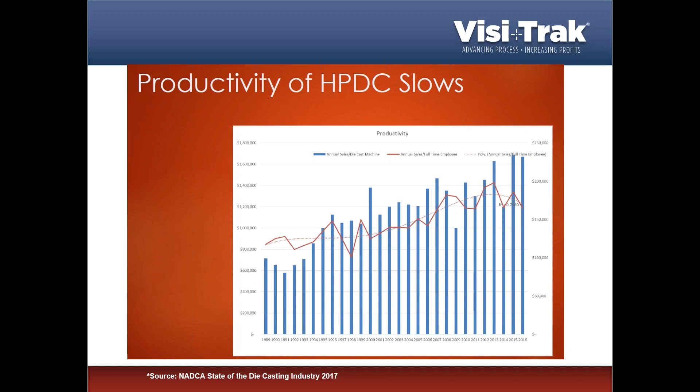But there are alternatives to casting. The steel industry is very strong. Some consider stamping or forging, and in recent years we've seen parts that were made of steel come over to aluminum, which has been great for us. But if productivity is not maintained at a high level, you lose some of those cost advantages. So as an industry, we feel it's very important to look at ways for casters to improve their productivity.

So of course, you look at your machine, you have unscheduled time that doesn't count against you. The machine's not supposed to be running. That's not necessarily a bad thing. But if you are supposed to be running, the first metric we look at is availability. So that's your A.

Anytime anything knocks your machine out of production, that's going to affect your OEE score and drag it down. The second metric that is included in OEE is your P, which is your performance, which is your cycle time, and that just relates how long it takes you to make a part for each cycle of the machine. Final metric is quality. Anything that counts against that is parts that are scrapped, that are not made within specification and

need to be scrapped. So I thought it was really interesting at the recent plant management conference. The top topic that people wanted to cover was improving productivity, and we do kind of a roundtable discussion, and people throw out ideas about what we can do to improve productivity. And I was in the audience listening to all of the suggestions that were being mentioned, but they all related to decreasing your cycle time.

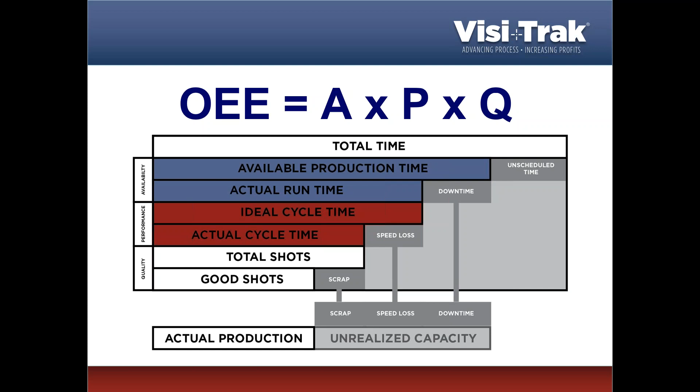When we talk about casting, we think about it as a holistic process. It starts with simulation, then goes to die concept and continues on through processing and process monitoring. You look at this and say, we need all this in the die casting process, and if you take anything away, it's going to adversely affect it. But then you also want to prioritize within this process. What are the most important things, where can I get the most bang for the buck, and what do we want to prioritize on?

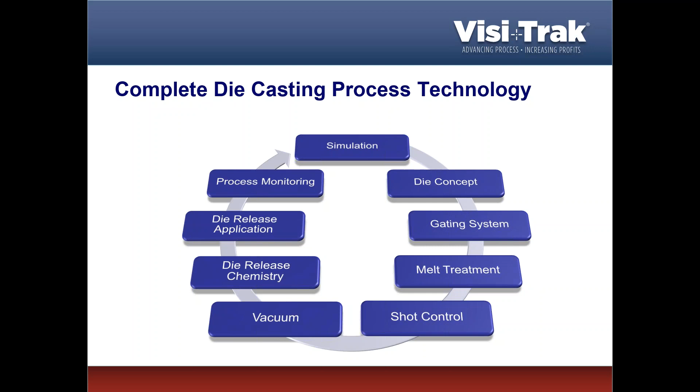I think if you ask most experienced casters, they would pick out two priorities in this process, and first and foremost is die concept. You can't have a good process, and you can't make a good part without a good die concept. So that's really important. But of equal importance is shot control, making sure you have a machine that is capable of optimal shot control. So in the presentation today, we're going to focus specifically on shot control.

At the plant management conference, another presenter was Hal Gerber of Shiloh Industries, and he had a good tangent in his discussion about the method of casters. We have simulation, we have die concepts, we have experience. Those are all ingredients that make up our process. Once you have that process defined, you want to be able to make it repeatable, and make sure your machine is capable of accomplishing what your method is telling you to do. So a shot control upgrade will give you this ability to be accurate and precise.

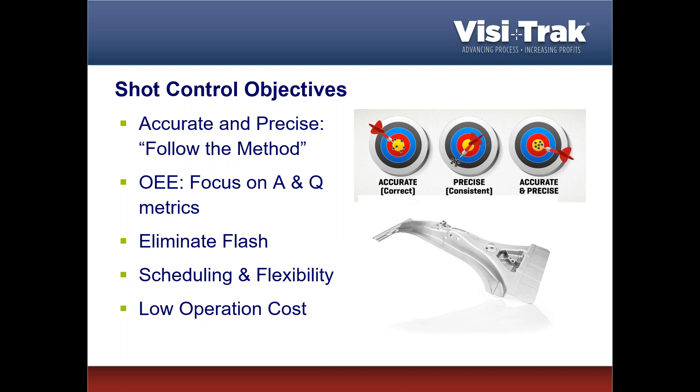Are your maintenance personnel spending a lot of time on the machine? You have a lot of downtime on the machine. These are all costs that affect your operating costs. We want to make sure that as a caster, you're really looking at all those costs and looking at ways to eliminate unnecessary costs. So really, really important, because shot control can help you out on those aspects.

And then after looking at objectives, we look at considerations. So you've got a die casting machine. What do I want to consider in terms of could it be upgraded and should it be upgraded? And sometimes we come into machines and we look at them and say, the machine is in such poor condition that it's not even worth investing more money to get this machine improved. And then we talk about machines, like snapping tie bars, that won't stay square. So machines like that, you're probably better off just scrapping the machine and getting another one to replace it.

But let's say the machine is in good enough condition, it has been maintained, there's just certain things that are lacking. In those instances, you want to evaluate the machine and consider which one of the upgrade paths would make sense and would be best for your machine. One of the big determiners that's going to do that is to look at the hydraulic layout. You've got your hydraulic schematic and everything's piped together on your machine. So you want to look at that.

And some of the things we look for is, does the machine have a close coupled accumulator? Is the hydraulic circuit neat? Is it efficient? And is it too complex, or is it simple? And I kind of illustrate this point by pointing out my experience in the die casting industry is 4 years. So I started with Visi-Trak in 2013, and before that I worked for Parker Hannifin distributor, and we sold hydraulic technology, but to general industrial applications. So we could have been on a steel mill, we could have been in a food processing plant, we could have been on transfer equipment.

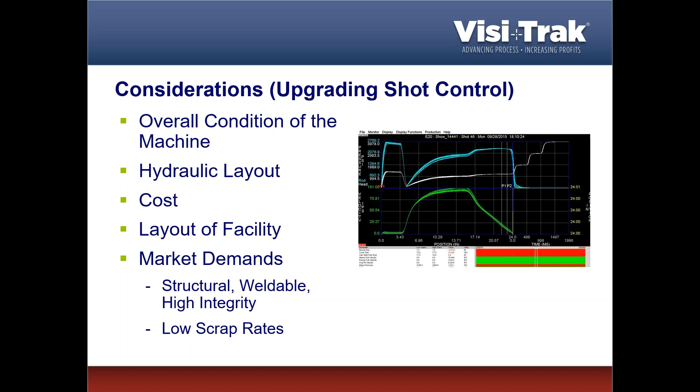This is a quick little slide just to illustrate a point, and I'll admit it's a little bit hokey, but let's just go with it. Let's say you were considering a Corvette, and two of your big considerations are going to be cost and performance. If you went with a brand new Corvette, there's a cost somewhere in the $79,000 range. But you could also consider a pre-owned Corvette, maybe 20 to 25 years old, and get that for a much lower cost. Cost difference in this is $60,000, $65,000, $68,000, something like that.

But you're going to get the better performance with the newer vehicle. You get the larger engine, more horsepower, your 0 to 60 is a lot faster. So how does that balance out? Well, what if there was a box of parts you could implement into the older Corvette, and get performance that either approaches or matches the brand new vehicle? Is this realistic on a Corvette? Well, probably not. But in a die casting machine, we have taken machines that were 20, 25 years old and had them perform just as good as a brand new machine.

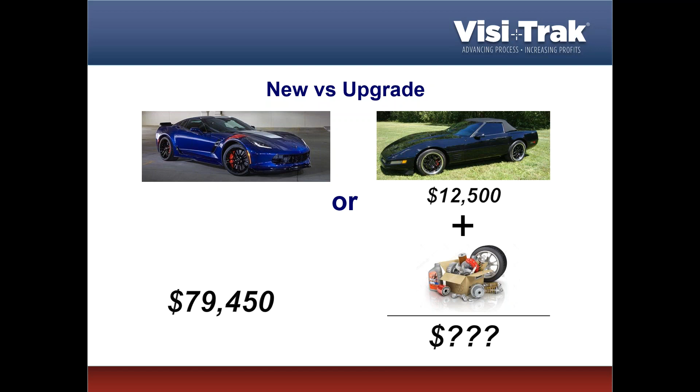How much is that box of parts going to cost? That goes back to our slide about considerations, but the other side of it is the performance side. When we're talking about your machine and your performance, you want to have a very responsive system. A lot of casters are taking an approach called MFT, minimum fill time. So you have a very slow, drawn out advance of the metal to the gate, and then once you get metal at the gate, you want to ramp up to a very high speed and a very rapid acceleration.

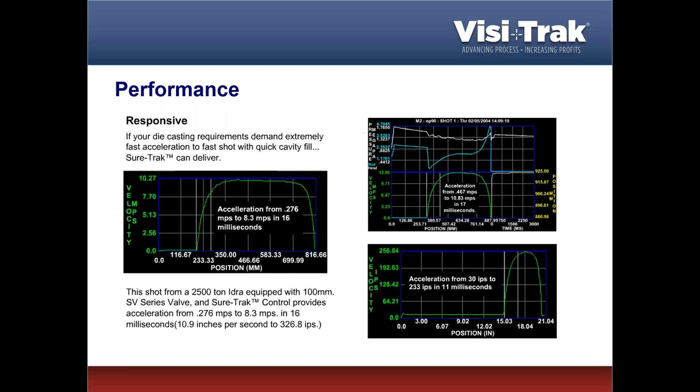The other two examples here are just some other machines, but if you're into the metric system, we've got in the top on the right, they're going from 0.467 meters per second all the way up to 10.8 meters per second. That's only taking 17 milliseconds. And then to get back to the English units, in this bottom right, we're going from 30 inches per second to 233 inches per second in only 11 milliseconds.

So now I'm going to focus on some different hydraulic circuits that we encounter on die cast machines. The first I'm going to look at is meter in with brake, and in total we'll look at three different configurations, and each one could be identified with being made in a certain geography and of a certain vintage. This one is typically seen in the Chinese market, where it's a meter in and a brake valve. The basic principle here is you've got your injection cylinder, and when you're injecting metal, your cylinder is extending basically over to the right here. And we've got an accumulator that's fully charged up.

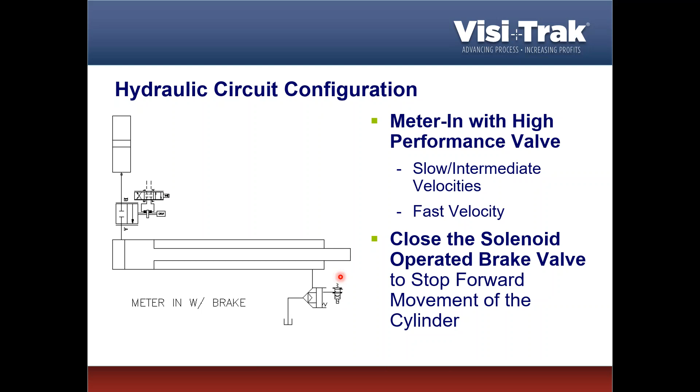We will have a high-performance proportional or servo-operated cartridge valve, which is in charge of modulating the flow from the accumulator into the head end of the injection cylinder. We'll open this valve a little bit to get a slower speed, and open it a lot to get a faster speed, and we'll use this high-performance valve for both the slow phase and the fast phase of injection. When we need to stop the forward movement of the cylinder, you can't stop it completely by closing this valve. You've still got the forward momentum and all this fluid on the rod side. So what we'll do is close this valve off on the rod side, and that'll basically stop fluid from moving out, and that will stop the forward movement of the cylinder. So that's a meter in with brake hydraulic configuration.

The second configuration we'll look at is what we call a meter out circuit, and the meter out circuit is pretty typical of a machine built in North America. Prince and HPM basically manufactured to this concept. Same thing, we've got an injection cylinder being fed by an accumulator. In this instance, in order to start movement, we will open up this blocking valve, and that gives full pressure, full flow capability into the head end.

In order to control speed, we will have a high performance valve on the rod side and modulate this valve. For a slower speed we'll open this a little bit to have a little bit of flow, and for a faster speed we'll open it a lot to get faster flow and faster speed. In this circuit, we're controlling all three phases of the cylinder's forward movement with the high performance valve. So we're doing slow phase, fast phase, and low impact, all with one single high performance valve.

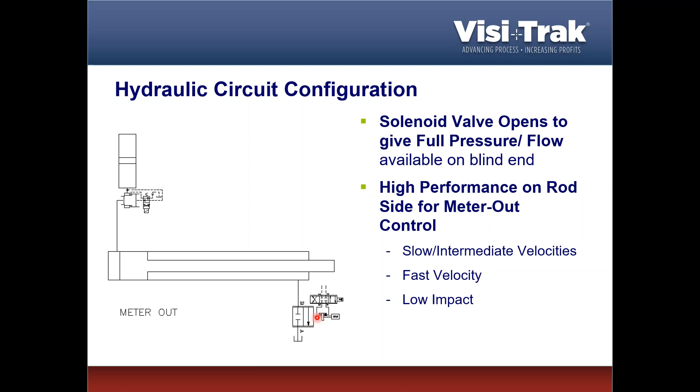The third and final configuration we're going to look at is what we refer to as a double meter in and a meter out. So you've got three different phases of movement, and you've got a separate high performance valve to handle each separate phase. You'll size the valve in accordance with whichever speed you need during that phase. So you'll have a smaller valve to do your slow and intermediate velocities, and then you'll have a larger valve, probably the largest valve in your circuit, which is in charge of modulating flow into the cylinder during your fast velocities.

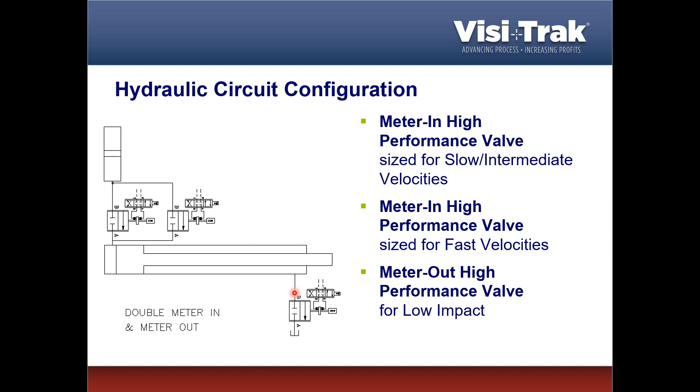When you need to stop after your die cavity is full, and you want to stop forward momentum of the cylinder, you'll be able to ramp it down with what's referred to as a low impact valve. This again will be sized in accordance with the flow rate out of the rod side of the cylinder while ramping down from your fast phase to low impact.

Looking at all three circuits, let's do a little compare and contrast. Again, talk about cost and performance. Out of the three different options, they'll have different costs.

Think about which one would be the most expensive. Well, the double meter in with meter out has three high performance valves, so in terms of upfront cost and spare part cost, this configuration is going to be the most costly, the highest cost associated with it.

And then let's talk about performance. So we say, what's the performance of each different configuration? Well, we do have a high performance valve on the meter in for your slow phase and your fast phase velocities, so you can get good performance out of that.

But when you talk about your end of shot position, in these instances, this brake valve is usually just a solenoid operated valve, which is being commanded by a PLC, which has a scan rate. And the faster you go, that scan rate may not be able to keep up and be consistent. So you also have a response time associated with this solenoid valve. So in other words, we give a signal to say close. It's going to take 30 milliseconds or whatever it takes to fully close.

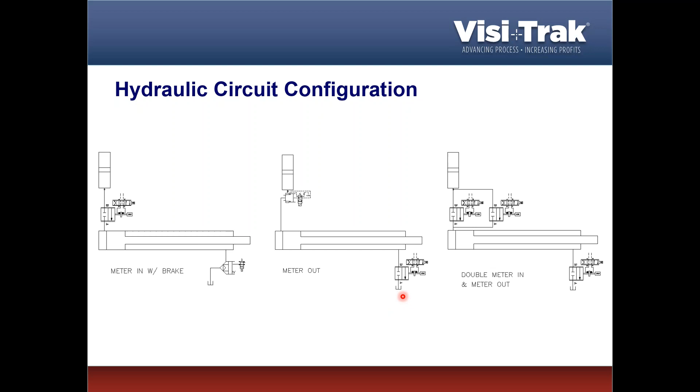Why we see better repeatability in this instance is because we've only got one valve doing it, so we don't have to trade off control. So we tend to see better performance using the meter out circuit. But we see the best performance out of the circuit when we also implement the valve that is designed specifically for the die casting operation, which is the Olmsted SV valve.

So this is a valve that's a result of a joint development between Olmsted Products and Visi-Trak, probably back in the late 90s or early 2000s, and it's a DIN cartridge, meaning wherever you are in the world, people can manufacture to the specs. So your Parker Hannifins, your Vickers, your Bosch Rexroths, everybody makes the valve to the specification, and what that allows you to say is wherever I am in the world, I can have confidence that I'll be able to acquire a valve that'll fit into this hydraulic circuit.

But the real benefit of this valve is that, again, it was designed specifically for the die casting process. So it is designed to handle your slow phase, your fast phase, and your low impact phases. And one of the big reasons that we're able to do that is because of the flow window. And when I say flow window, this is the path that the hydraulic fluid follows to get out of the cylinder and basically back to tank.

We're modulating it in this flow window, and you can't see it great in this picture, so I'll just kind of draw it out. At the factory, they call it the bike seat, just because it's kind of in the shape of a bike seat. And basically the principle here is for slow phases we'll be in this metering notch here, and just allow a little bit of flow. That's when we can do real fine, precise control on the slower speeds.

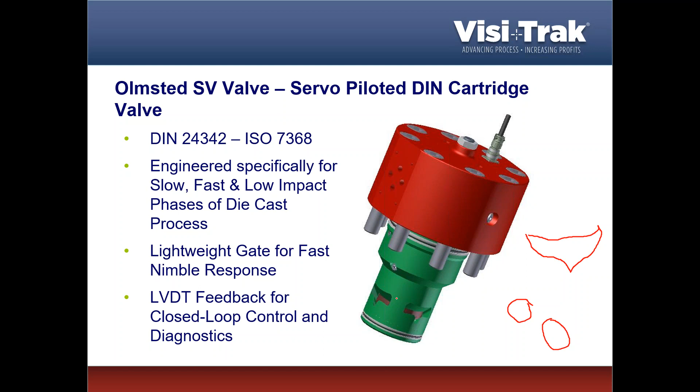If you do closed loop controls, we'll do that specifically on your speed. So it allows us to be a lot more repeatable, no matter what speed you're commanding. Also, the LVDT allows you to do some diagnostics. So when you're setting up, when you're tuning the valve, you can look at the LVDT feedback and know where you're at. And if you're having any troubleshooting, you can command the valve to do different things and make sure that what you're commanding is also what you're actually seeing on the valve.

And there's companies out there that offer brand new shot ends. I would say two of the most prominent in our industry are Diecast Press and ITL, who are regular customers of Visi-Trak, and they're happy to implement Visi-Trak's technology into a new shot end. So that's one upgrade path, is to replace the shot end.

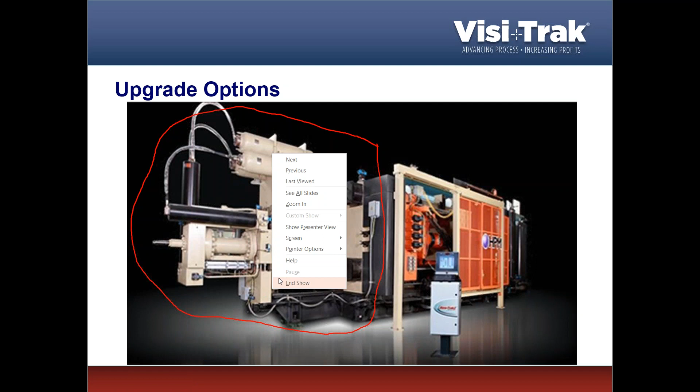Next, a little bit less than a new shot end, would be to consider what we refer to as a modified hydraulic circuit. In this instance, the clamp is still good. Most of the injection cylinder and everything on the shot end is in pretty good condition. So the shot cylinder is good. The accumulator is close coupled, but the hydraulics that control your injection movement are kind of lacking.

So in those instances, we would eliminate the existing hydraulic circuit and implement a new hydraulic circuit using the Olmsted valve. Of less complexity is what we refer to as just implementing our valve. On these machines, they already have a DIN cartridge valve cavity. All we need to do is take out a valve, install a new valve somewhere in this region, and then we can implement the new valve plus the Visi-Trak control system and accomplish a control upgrade.

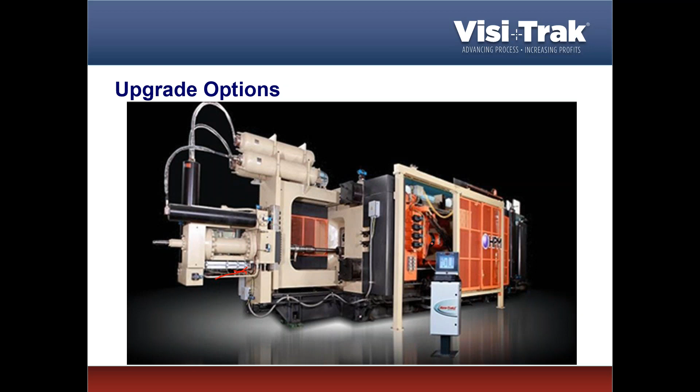And then the final upgrade path is, let's say you just want to keep your hydraulic circuit as is, but then just implement a new hydraulic control system, and we can accomplish that also depending on the configuration of your machine. So again, those are your upgrade options, starting from the most costly and then ranging down in terms of complexity and cost.

Now I'm going to shift into the couple case studies that we have to show, and we're going to go the other way. We're going to start at one of the easier, not very complex control upgrades to implement, and the following two are going to be a little bit more costly and more work to implement. This is a nice case study here. This was the portion that John Cleary of Allcast presented. They had a relatively new LK machine in their facility, and they were doing okay with it, but they had a couple reasons why they wanted to change it out.

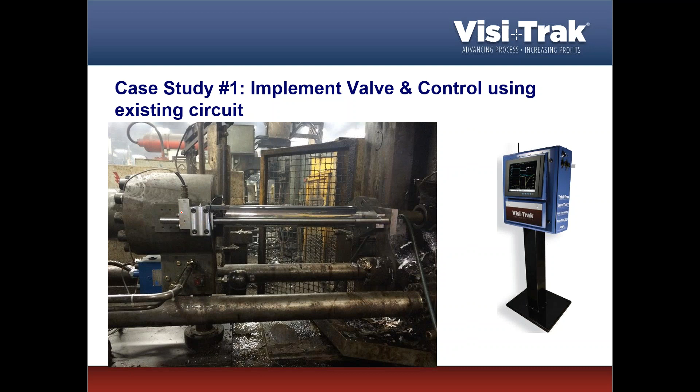So they went ahead and implemented the Visi-Trak control solution, and this was fairly easy to do because all we needed to do was implement our control system. They already had a hydraulic cartridge valve in the circuit, so we simply needed to remove that valve and in its place install the Olmsted valve. We also implemented our sensing technology. This is really one of the best ways to know your position and velocity of your injection cylinder. Visi-Trak was one of the pioneers in this technology, which has since been copied by many die casting applications.

So what I've basically done is taken John's presentation and condensed that. This was a nice quote that he shared, and it speaks to how the casting industry has evolved in the 30-odd years that he's been in it. When he started in 1982, if you controlled 95% of your variables within the casting process, you had a good chance of making an acceptable casting and having a good process. But with advances in what casting customers are asking for these days, you now pretty much have to get 100% of your variables in control to make sure you have a quality casting and a good process.

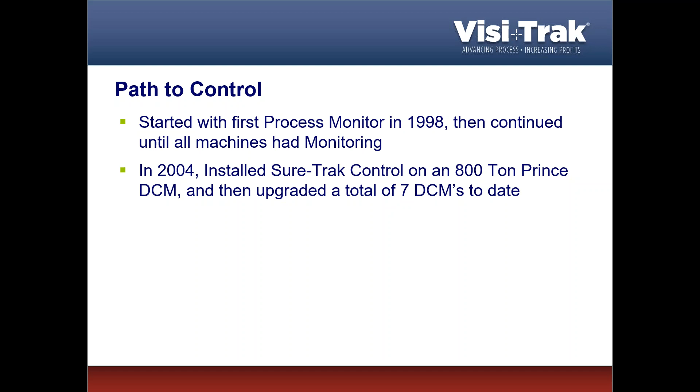So he shared a little bit about their path to control, and it was actually pretty similar across much of our customer base. They started with process monitoring on a single machine, and once they had our monitoring system implemented on one machine, they quickly followed suit installing monitoring on all of their machines because of the benefits it brings. Then in 2004, they got started with their first control upgrade, an 800-ton Prince die-cast machine, and since then, they've got a total of 7 die-cast machines which have implemented the Visi-Trak Sure-Trak control system.

And why upgrade? They already had the monitoring on all of their machines, and they were seeing the variance in performance on their machines controlled by the Sure-Trak control system versus the machines controlled with PLC machine control. What I'll show in the next couple slides is they were able to get consistent performance out of their Sure-Trak controller, but not so much off of their PLC machine control.

And why is that? Because with a lot of PLC machine control, you're dealing with a scan rate which may not be optimized to the casting process. And you're also dealing with solenoid operated pilot valves, which have a response time associated with them. So the repeatability when you're going high speeds is not that great. Here's what they found. This is a comparison.

On the left would be their machine, which is controlled with just a PLC controller, and on the right is the Visi-Trak controller. And calculated startup fast shot, very important process parameter to casting. You want to be accelerating metal into the die cavity. But if you start your fast shot early, you're going to get caught at that gate, and you won't get good performance. And same thing, if you start late, that's problematic as well.

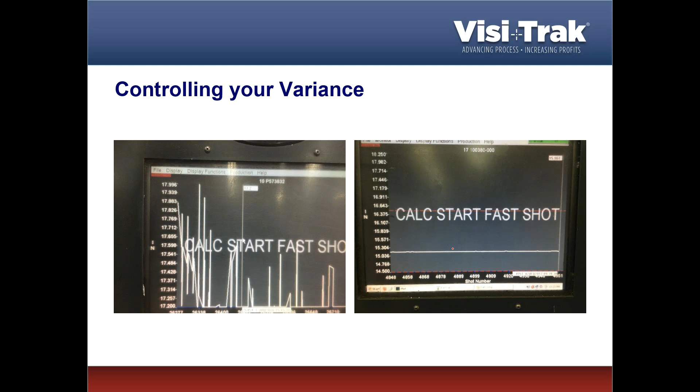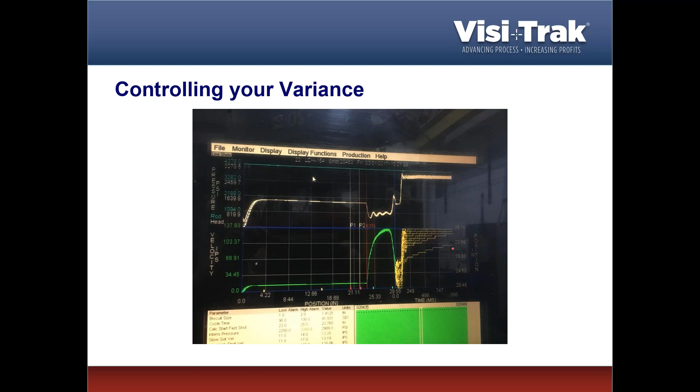But as you can see, with the PLC control they were not getting consistent performance. But with the Sure-Trak controller, very, very good consistency across their process. For those that are really familiar with Visi-Trak, we have a feature where we can overlay. So from cycle to cycle, we'll put shots on top of another, and it's just a good way to check repeatability. And this is a picture from one of their processes, and you can see with the Sure-Trak controller, they're calling for it, they're hitting it, and they're just repeatable again and again.

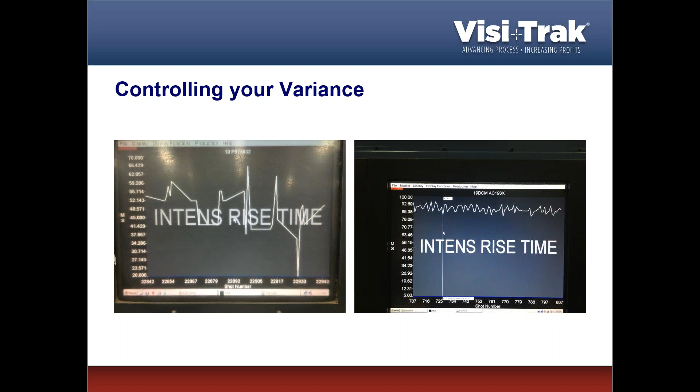We also did intensification control through our control system, so not only the injection, we can also control from an electrically driven proportional or servo valve. We can control their intensification process. And again, you can see that in the process parameter, it went from a very unstable, not repeatable process to much better consistency in the Sure-Trak controller.

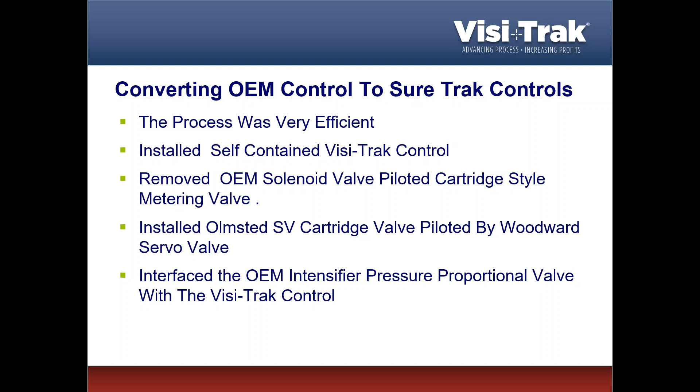What was the process like for them? John shared that it was very efficient, and this is the process that they followed. They installed the Visi-Trak control system, removed the existing OEM supplied cartridge valve, installed the Olmsted SV valve, and interfaced the intensifier control valve to our control system. So they did the first one, and it only took about 2 days. And then after that, they did 2 more machines on site, and it was down to like a 4-hour upgrade. So they were taking these machines out but getting them right back into production, which is very, very good performance.

And what were the benefits? This is direct from John Clary, and we love to see this feedback. They were basically uniform throughout their process. All their process control technicians only needed to learn one system. Their maintenance personnel only needed to learn one system, and all the spare parts were good across their entire floor. And again, this was written by John Clary, so excellent customer support. Thank you. It was very, very nice to hear, and also very important for us at Visi-Trak.

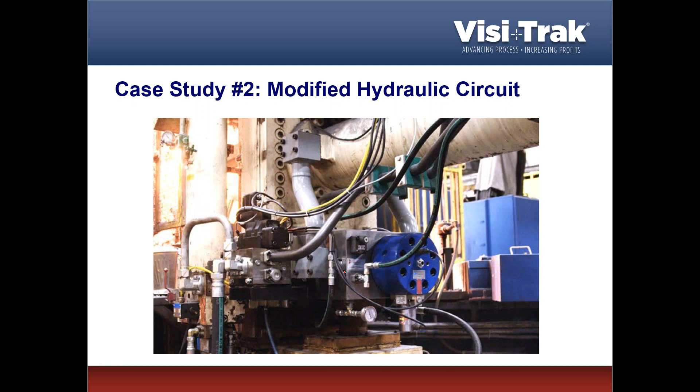So the next case study, number 2, is the control upgrade that we implemented at Metaldyne in Twinsburg, and this is where we're going to do a modified hydraulic circuit. In this instance, the clamp, everything was good on that side. Most of the shot end hydraulics were in good shape. It was just the hydraulic circuit was not optimized, and we didn't have a path where we could simply insert the Olmsted valve. We needed to make some changes to the way the hydraulic circuit was piped, and this is a picture of what that looks like.

Near the end of 2013, we started talking to Metaldyne, and they had a project. These were some of the objectives they were looking at. They had one machine in particular where they wanted to improve part quality, and they felt they could do so by improving the accuracy and consistency of these 4 process parameters. And I think any caster will agree that those are critical process parameters. So they wanted to look at ways they could get better performance there. They also had a high incidence of flashing on this machine.

And they also had a lot of work scheduled on this machine, so anything that they were going to implement, they needed to do so in a way where it would get the machine back into service ASAP. They had a lot of downtime on this machine, so the maintenance technicians were spending a lot of time. They had to purchase a lot of spare parts to keep the machine running, so ways they could eliminate those hassles. And also looking ahead to what their customers were demanding, being able to improve the capability of the machine was going to be really important to them. And they considered a number of different paths: new machine, new shot end.

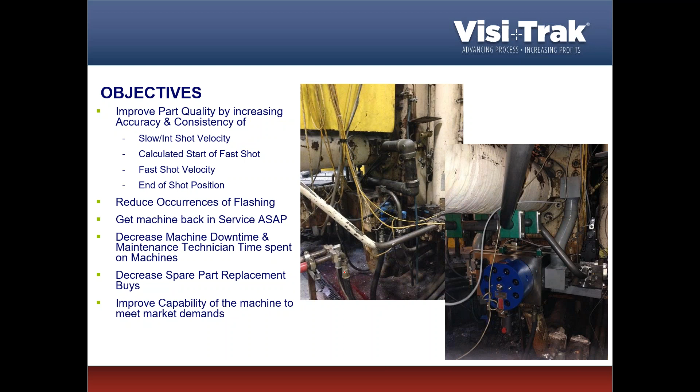Ultimately, what they decided was what we presented, which was for their machine, which was built in 1994, and this was upgraded in August of 2014, and consisted of the controller, the valve, a servo valve, and a conversion manifold. When we did this conversion manifold, we wanted to do so where it would not impact the machine too greatly, and we'd be able to reuse a lot of parts of the circuit.

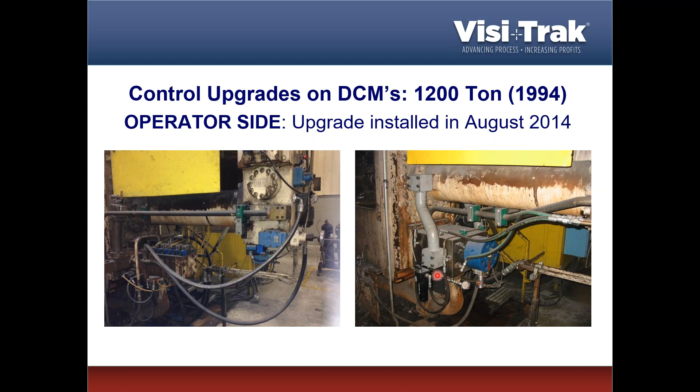So what you'll notice on the tank line is that we were able to reuse the tank line. So we had to do some measurements to make sure everything was going to line up properly, so we'd be able to mount right back in. But we were able to accomplish that. And here's some other pictures. This is just from the other side. We also implemented intensification pressure control on this upgrade as well.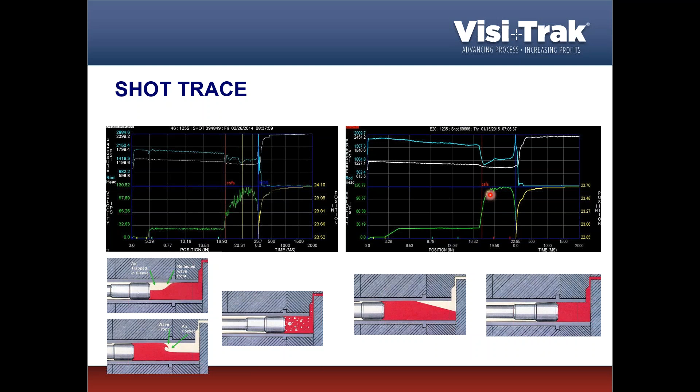What you also notice is what we refer to as the rise time. You'll see a relatively gradual increase in speed until they attain their fast shot speed. But with the Visi-Trak control system, it's very, very rapid response in terms of getting to the fast shot speed that they were commanding.

So what were the results? First of all, we were able to accomplish getting their machine back in a very fast time frame. In the first machine that we upgraded, it took 5 days to implement the hydraulics. In subsequent upgrades, we got that down to about 3 days. As I went through in the previous slide, they did accomplish the marked improvement in accuracy and consistency for those critical process parameters. And flashing was almost completely eliminated on this machine. So once we did the first machine, they took the parts to X-ray, got approval, they went into production, and they were real happy with it.

What commenced afterwards were a couple studies that they wanted to look at internally. One of the studies was a machine utilization, where they took 3 machines running the exact same part at the exact same time, and one of the machines had the Visi-Trak system, and the other 2 just ran on the original OEM supplied system, and compared what they saw on the different machines over a couple production runs. They found that it was a 20% increase in machine utilization on the Visi-Trak system, which is a big impact, very good improvement, and that's what led them to upgrade 5 more machines the following year.

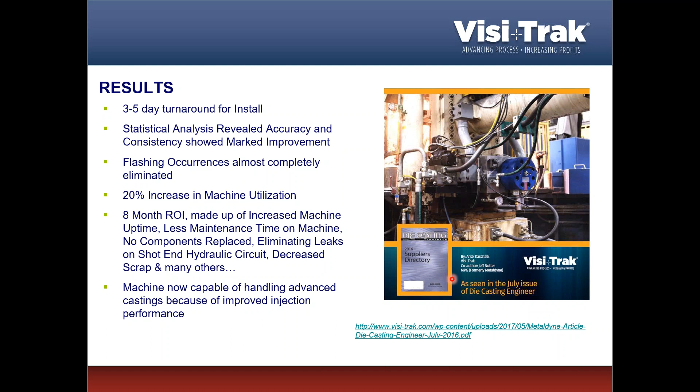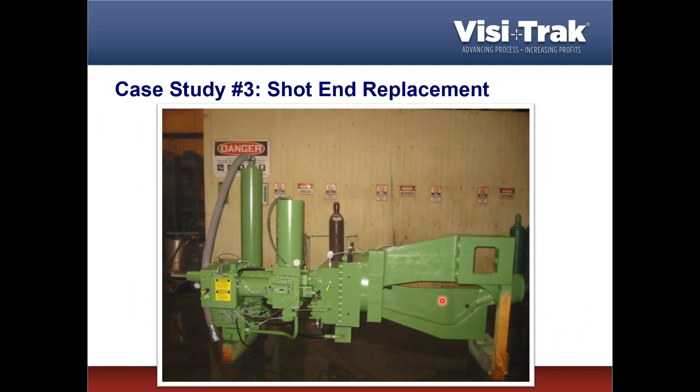The final case study, and I'll kind of wrap this up here, is a new shot end. This is a new shot end that was built by Die Cast Press, and this was on an Ube machine. There was no path on the Ube machine. We couldn't simply implement the valve, and we couldn't really change the hydraulic circuit. The only real path to upgrade was a complete new shot end. The previous slide was at the factory as it was built, and this is at the customer's site where it was implemented.

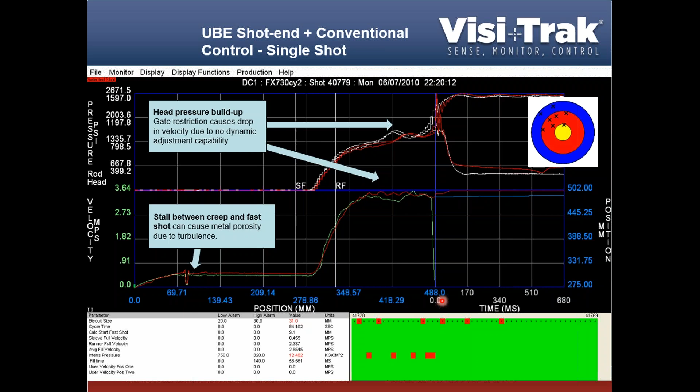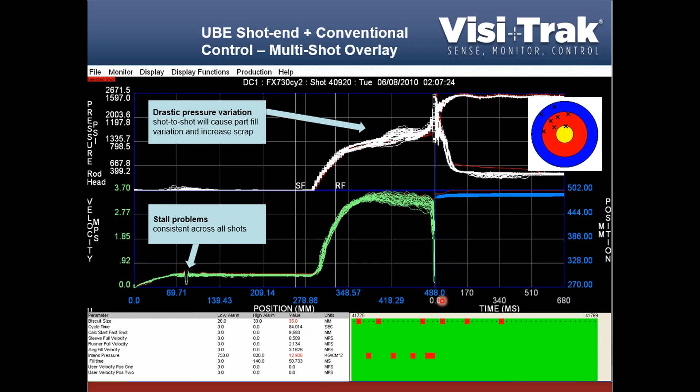But why did they choose a control upgrade on theirs? They weren't able to achieve the performance. They were programming their machine to do one thing, and they were not getting that, and they were not repeatable. So this is our overlay chart. There's no process consistency there.